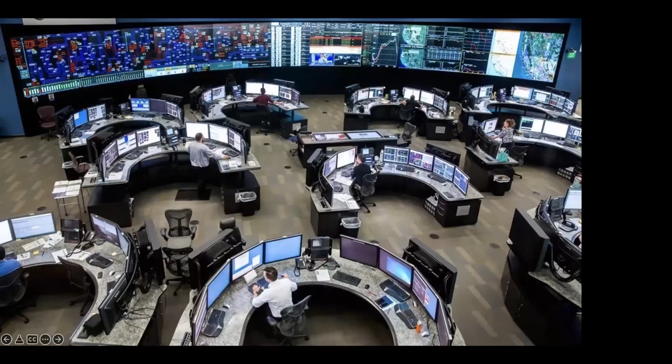What does it mean for the control room? Some of you have already been there, and we know that every desk has its own job, maybe doing the security analysis, looking at the renewables, and what I think is that we need a new desk, which is a resiliency desk, and they have to coordinate with, of course, all the other operators and supervisors and engineers. But as these events are unfolding, they have some time before the event hits, because most of these weather events can be predicted in advance with certain accuracy. Not a lot of accuracy, but we can predict with certain accuracy, and we can prepare for it.

We can take some proactive action, but we don't have tools for that. How do we tell operators what to do, right? So we definitely need some tools for that. And these events are very different, right? There are wildfires, which happen in specific areas. There are snowstorms, there are hurricanes, and these will keep happening in different regions. And second, they will impact the grid in a different way, right?

Like a flood will impact any low-lying substation, while it may not be impacted as much by hurricanes and snowstorms. Wildfire will have a different impact. If you put the lines underground, snowstorms and hurricanes will have less impact, but flood might have more, right? Cybersecurity is a totally different event, which needs to be further thought through. How do we make our grid resilient against that? But cybersecurity brings another dimension because it cannot be predicted most of the time. So today, at least I'm going to focus more on weather events.

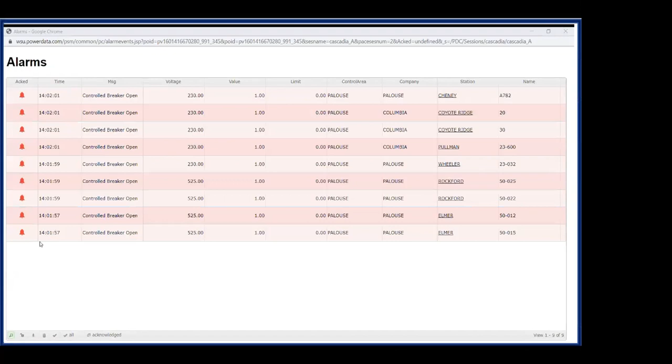Now, what does it mean for the power grid operators? They will see some alert if the event is going to come. And typically that happens on the TV on one side of the control room. They keep watching the weather. And once the event hits, they will start seeing a lot of alarms. And these alarms need to be taken care of in advance, because during these events, they are going to be in the hundreds. So no human operator can process them and decide which one to focus on, right? So we have to take some proactive action, and we need some kind of tool which will prioritize these alarms and impacts and tell them where to focus.

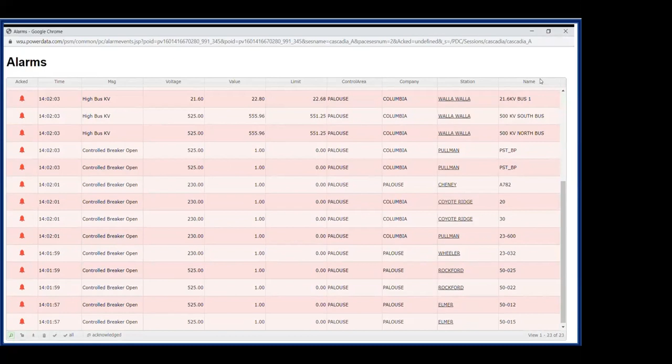Right? But one thing is sure: these kinds of events will put power grid operators in a much more stressful condition compared to normal operation and the failures that are very common in the power grid. And the only way we can help operators make these decisions is through tools. And these tools need to be very, very advanced, right? So what can we do about it? There's a lot to do.

The first one is definitely a tool which will tell them the expected impact, which will tell them, when the event is passing through, about the different alarms and which one to focus on. And after the event has gone, how do we restore the power, right? So we need these different tools, which means that there has to be some planning and proactive action. There has to be some real-time tools during the event, and there has to be some after that, right?

And what would enable is only to make a decision, either in long-term or short-term or after the event. We also need to train them to use these tools and consider cognitive science and cognitive abilities of the operators when we do this kind of training. And even for the tools, we need to always keep in mind how much a human mind can process in a short time when this kind of event is happening.

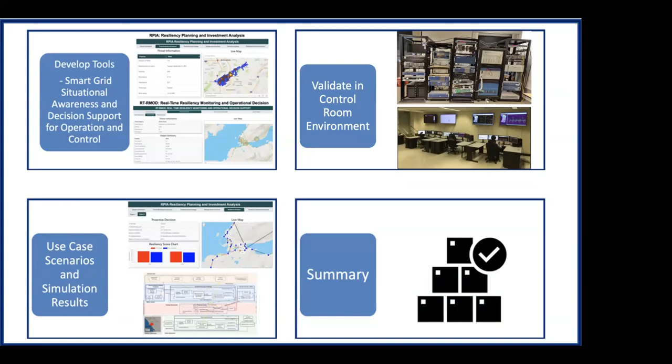So next, I'm going to focus on, like I said, the tools, then how do we validate it, some case scenarios and summary. And I always think that this is a work in progress. We are still scratching the surface because it's such a large and challenging problem to solve, because even state estimation is not robust enough to give you a solution when your sensors are failing, your grid is failing. So a lot to work on.

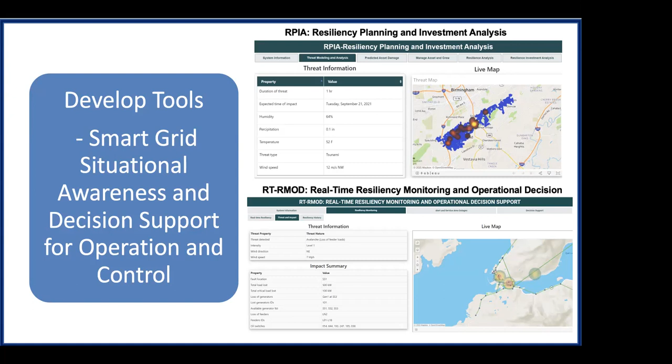So let's talk about tools, and the two tools that I'm going to talk about are resiliency planning and investment analysis, which we call RPIA, and the other one is RT-RMOD, which is real-time resiliency monitoring and operation decision. Now both of these tools, like I said, are still very preliminary. Even though we have invested several years on this, maybe more than 7 years now, with different funding, and it's still continuing, there's a lot to do.

And what we want these tools to help us do is monitor the resilience, which means we've got to have some metric, and we can see what resiliency is given a certain event. This is very important, because resiliency will change if the event is changing, because it will have a different impact on the grid. And then we want to see how it's changing if I take some action, either in long term or short term. So that's what we want to use that metric for.

And we need to compute that metric pretty quick. Quick means not in milliseconds, but at least in seconds. And continuously monitor the resilience using that tool, right? So that's about situational awareness of resiliency. And once we know what resiliency will look like if something is happening, and if we take some action in long term or short term, how it will impact, that should enable us to take a decision.

So for example, if I take all those alarms that come during the event and after, we will check which alarm needs to be taken care of first, because if we take care of that, then resiliency will improve, right? So we can compare those things using this index or metric. Proactive control, corrective control, resource coordination. A lot of these things need to be done, and some cannot be done in an optimal way because we don't have time for that. We don't have data for that. So we need to apply some non-optimal way and then some optimal way, depending upon how much data we have while doing this decision support to operators.

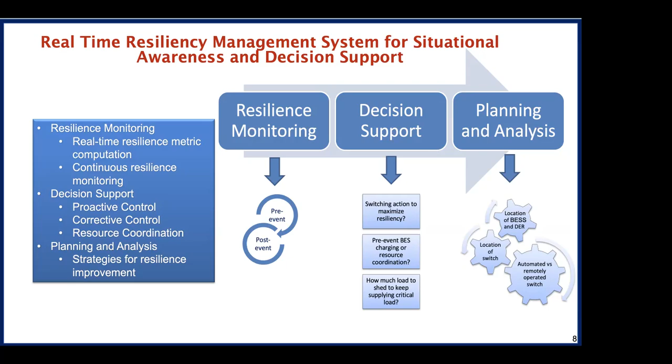And then, in terms of planning analysis, when we have a limited amount of money, where to invest and where to install those things. All of these can be, with the candidate solution, we can use this metric to tell us what to do. So finally, what we want is that there is an electric grid, either it's a distribution system or it's transmission.

And then not only do we need electric grid network information with all the resources, but we also need to know what event we are trying to protect against. We need to know some spatial information, either it's coming from satellite or from any other information that we can get for the event. We need to know some vegetation data.

We need to know infrastructure data, which is very important because for the grid, all the lines, everything is on a pole or substation or different devices, which we can call electrical grid infrastructure. And those data are there, but not in the same database. So we need to pull data from different databases. So we have all this information to analyze what will be impacted.

And then of course we need to make a planning decision, an operator decision, in different scenarios. So one is blue sky, where everything is operating very well. Black sky when these big events happen, and gray sky when the event has impacted you. And then we are in recovery mode, which is gray sky.

So based on these, what we want to do is be prepared for the expected event. We want to be robust so that the event will minimally impact the grid. And then we want to be ready with the response or recovery plan. And these two tools that we are thinking about, RPIA and our RT-RMOD, are going to basically help with those things, right?

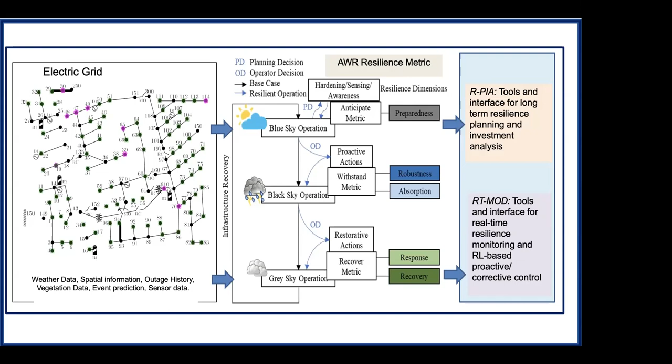So before we talk about that, I'm going to talk about AWR, then R-PIA, and then a little bit about RT mod. The first one, even though now we know a little bit more and there are multiple definitions that already exist, what is resilience before we put a metric around it? And there are multiple definitions that evolved over time and in the last couple of years.

I believe that there should be focus on critical load, because if we focus on all the load, then it's reliability, which we already do. In simple terms, it's the ability of the system to supply its critical load, even in the presence of multiple contingencies. Now, if you notice here, I did say system ability. Which means that it's more like a stability and security concept. It's not like reliability, which is performance-based.

Now, we have looked at a lot of literature, and we're still looking at it as it's coming. The two different approaches taken are performance-based and system characteristic-based. And I think system characteristic is the one that we need if we want to know what to do to fix it, because that will be represented in the system-level metrics.

And the one which I like is from FERC, which is the ability to withstand and reduce the magnitude and duration of disruptive events. Of course, it includes the capacity to anticipate, withstand, adapt, and recover. Now, these three words are important: anticipate, withstand, and recover. We took these three things and said, okay, in the power grid system, what are the different parameters which will impact my ability to anticipate, ability to withstand, and ability to recover. And then we collect those factors and integrate them together to form three different metrics, which we call the AWR metrics.

And the other one is RT-RMOD, which is the real-time resiliency monitoring and operational decision support. Here you see we have system information and then resilience monitoring, and then alarm and service area outages. Basically, we want to process those. And then decision support, which is the most important one. Each of these tabs again opens up to several sub-tabs where we can get the information. Especially the left bottom one is showing you the resiliency metric for these five different colors, and we can compare that for anticipate, withstand, and recover.

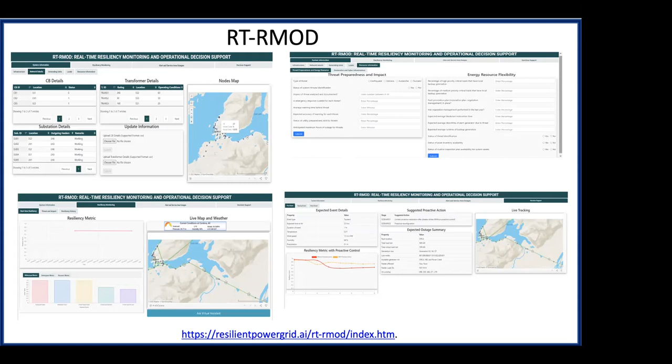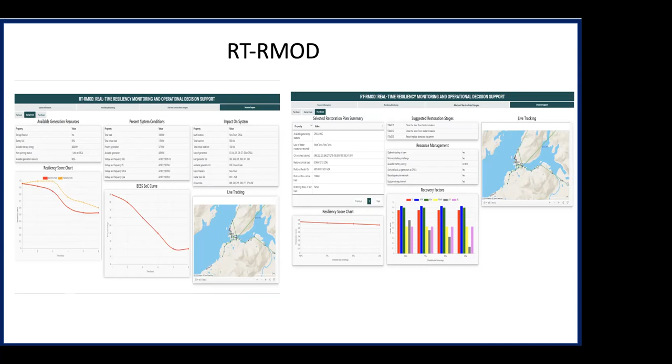So then next comes the decision support using these tools, and that's where a lot of work needs to be done. Here are some examples, like pre-event proactive control or post-event corrective control; we have multiple things to do. First we need to know the damage and outage estimation. So how do we use satellite images, ground cameras, and weather prediction to find out the damage and outage estimation in minimal time? Because that's what is important.

And then, if needed for proactive control, do we need to segment our grid so that the part where damage is expected will not cascade to the rest of the network? So how do we decide that part? That's a good problem to solve. Then in terms of distribution automation, where we have a lot of flexibility, how do we use it to make a sectionalization or cluster in a distribution grid so that any disturbance does not propagate?

And the second one is, if we have enough DER, how do we isolate that part? Sometimes we might need to form a temporary microgrid, because with the microgrid, the power we get, especially if it is diesel, or even steam or gas, is not the most economic. So we want it isolated only during these kinds of events, but most of the time it will be connected with the grid. That's how most microgrids work anyway.

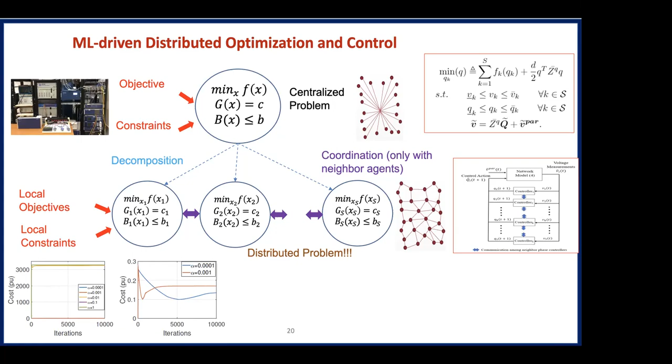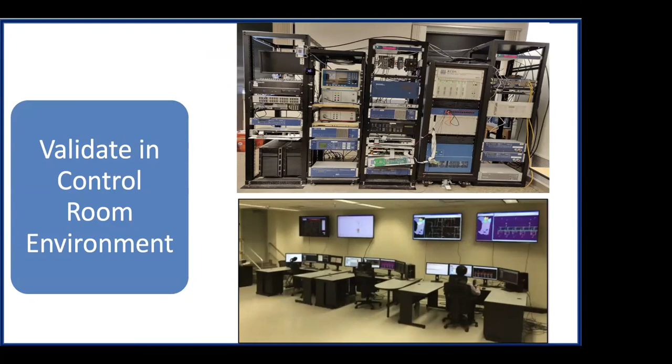So now let me talk about validating it, and this will be a very short section. We do need something like a substation environment with real sensors and controllers. And then we need something like a control center environment. Of course, these are very small scale that we have set up in our lab, but these two are definitely needed if we want to put our tools out and push them to a real utility. So we have to do preliminary testing here, and then large scale testing with the utility, and then solve the problem. So a little bit more detail on this, because we can even integrate our substation environment and control center environment together.

So this is based on one of the projects that we have been doing with NSF Big Ideas, and the partners are Berkeley and Vanderbilt. And here we are also collaborating with a company called Resilient Grid, which makes visualization software considering human cognitive science and cognitive engineering to develop these HMIs. And we are working with the IncSys PowerSimulator, which provides us basically all the EMS functions, like contingency analysis, alarm, AGC. So all those are there in that engine.

And we are bringing this set of data from our substation environment to a common database. And we also have a detailed cyber network model so that we can simulate those. And then finally, we're using PingThings for synchrophasor data set database and managing it. So all this integration is challenging, but we have been making some progress on that, so we can use our tools in this real-time environment.

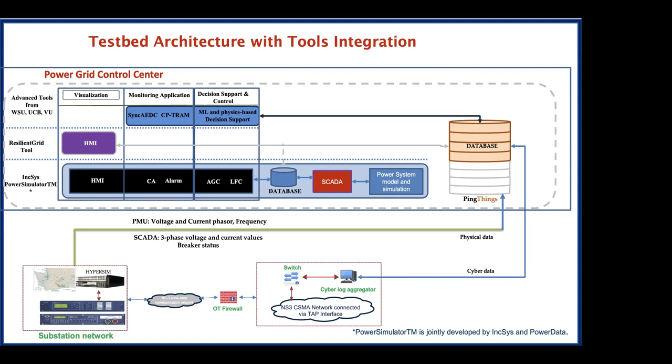And then cyber physical simulation test bed, which is kind of imitating the substation environment with the real devices. We mainly have SEL, but GE, ABB, and several others. And we worked with ARPA-E and Vanderbilt to develop this RIAPS node, which is for distributed control. So the small controllers that you see in the bottom figure, the three, those are basically representing distributed control. Of course, it could be more, it could be hundreds.

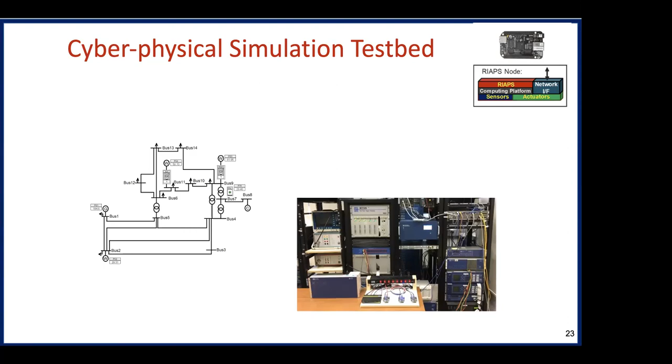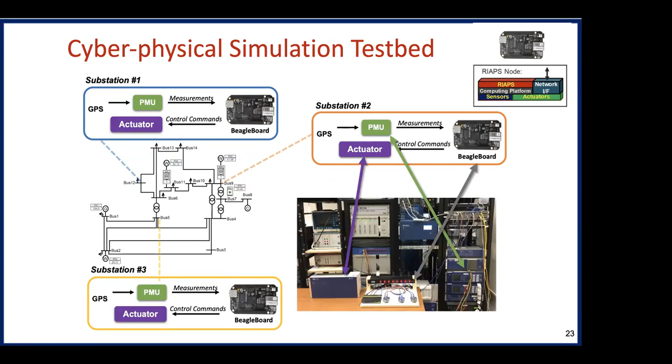But we just demonstrated with these three that if you have a system, we can put substation devices in terms of, here it's only PMU-based control. So it takes the PMU data and then goes to the BeagleBoard. That's where distributed optimization is running. And then we get the actuator and then we implement that control. So we were able to demonstrate that it works, even if it was suboptimal.

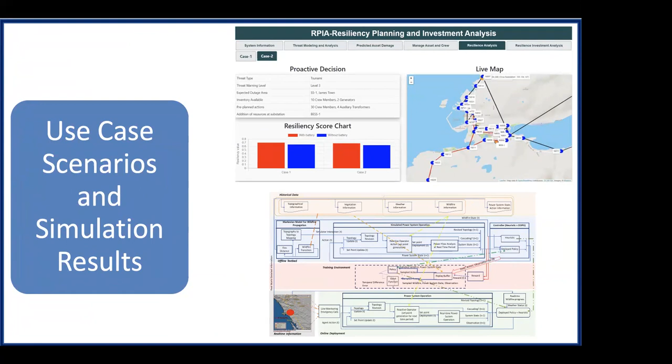And some of the cases that I'll demonstrate now, like I said before, what we are doing is only a fraction of things that need to be done, right? For transmission, for distribution. So there are different tools being used for different systems and different events. So I'll pick a few examples.

For example, we worked with Alaska where the tsunami was a problem, or at least expected sometime. And what we did is that we analyzed in terms of assets, even though you can also plan with the crew members, in terms of assets, where to invest our money in such a way that resilience is maximized, right? So here they wanted to buy a battery and see how it is going to maximize my resiliency. So again, using the same metrics, I can compare.

You can see case 1 and case 2, which are two different cases of batteries. And then it shows with battery and without battery, how much advantage you're going to get. So with the resiliency advantage and the amount of money that we're going to put for two different options of battery, and you can have multiple, like 100 options by placing it in different locations, compare, and then decide, okay, where to put my money.

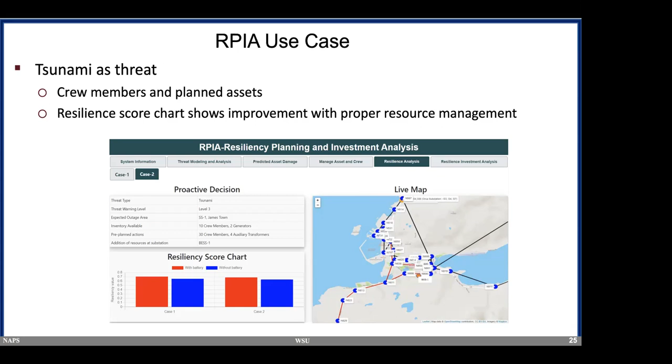Second case, I am going to talk about resiliency decision support. And this one is proactive control, so before the event is going to happen. And the whole concept here is based on the fact that you have switches in the field which are automated, and then you have switches in the field which are manual, right? So you have three different kinds. One is automated, one is remotely operated, and one is manually operated.

Now, automated, if it's there, we don't need to do much because you already set the logic for that. If it's manually operated, a crew member has to go and open it or close it well ahead of the expected event, so that they are safe. If it's remotely operated, then you just need to operate it, and you need to know which one to operate, so we have the minimal impact on the grid.

Now in this one, what we are looking at is how do I make a cluster of the system in such a way that the impact is not propagated. So we isolate the part which is going to be impacted anyway. And if we isolate it before the event happens, if we have good confidence in the prediction, then it definitely will not propagate, because that part is already isolated.

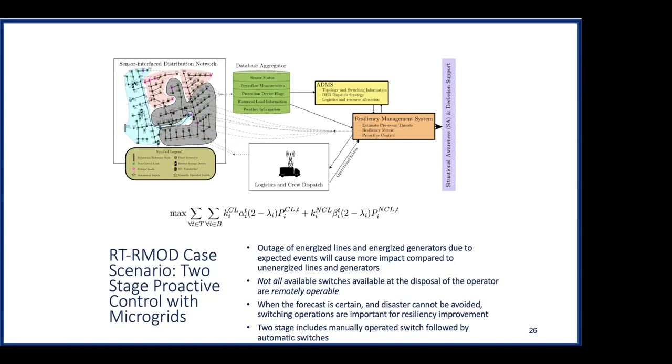So again, the focus here is that if we have a good prediction, then all the components which are going to be de-energized because of the impact of the event, how do we de-energize them ahead of the event so that the disturbance does not propagate? And it will require us to send the crew. It will require us to look at a lot of databases and then get the data from the ADMS so that we can put the resiliency management system, which is basically RT-RMOD here, to compute the metrics and decide where to isolate.

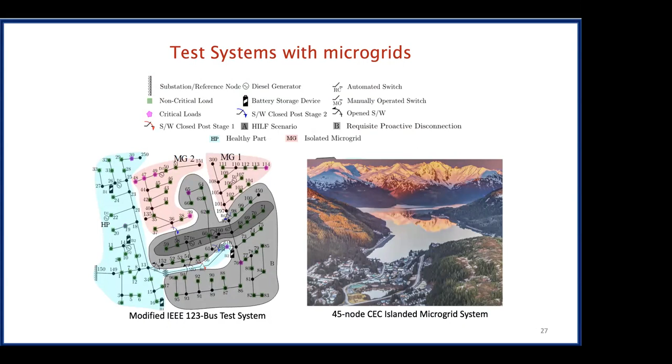So this one is the Alaska system that we worked with, CEC, Cordova Electric Cooperative. And of course, we did use an aggregated model, but it can be done for an IEEE test system or even any larger system. And this is how it will look after the modeling.

So we have a predicted event and it's progressing well. And then there's a distribution network, which is a lot of interface of sensors, and we are getting those data. Early warning tells us that, okay, this is going to hit 1 hour or 2 hours later. And now we need to send the crew so we can open the manual switches. And then, just before, a few minutes before the event is going to hit, with the uncertainty which we already know, we open the remotely operated switches, and the automatic switch is going to take care of itself. Or sometimes we need to block them so they don't open automated switches, right? So all these actions need to be taken.

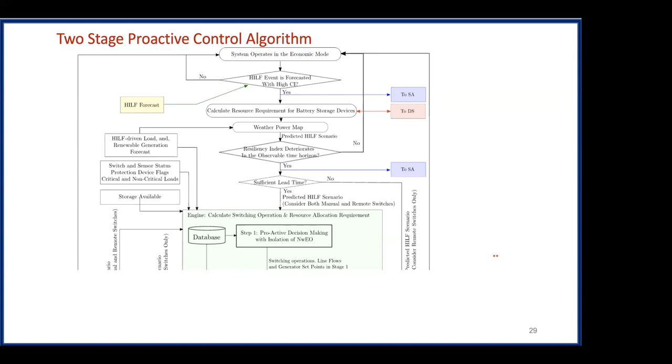And sometimes we will have a lead time sufficient enough to send the crew to open the manual switch. Sometimes we do not. So based on that, we can change our algorithm. Stage one is isolation of the network with the manual switch, and then stage two is the automated switch. So stage two is safety constraint switching without isolating the part which is important for us.

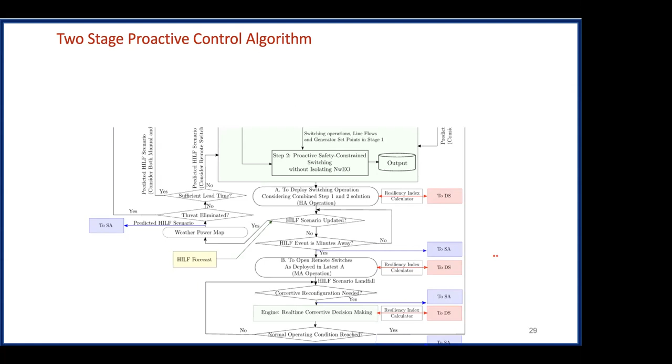And all of these two are going basically to two places. So one is situational awareness and one is decision support. So you see that To DS is decision support and To SA is situational awareness. And some are going and some are coming back, some are going to and fro. But all of these can be formulated and put in a set of equations with the objective function and constraints, considering all the power system constraints, and then we can solve it. And you can also solve the same thing with the distributed approach, which is still in progress that we are working on. But here's the result that you see.

And again, this is only one example of different things that need to be done and different things that we are doing. If I take action in advance, then the overall resiliency after the event is improved. So you see that the blue curve, which is showing the resiliency after, is higher after the event is gone. Right? If you don't do something, then it will become the red one, which means that after the event, it is not recovering and the resiliency is down. Right? And there are different scenarios that are shown here in the red, blue, and green.

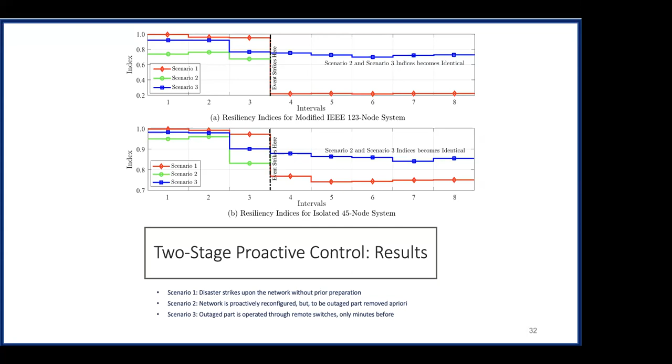If it's an outage event, then we need to focus more on that, and then rank them in such a way that the operator can make a decision on where to focus, and then find out why it is happening, what was the root cause that caused that outage, and then provide decision support. So the whole process is a little bit longer, which of course I did not talk about today. We only talked about monitoring and decision support, but this whole process needs to be followed, and each of these is a very challenging problem to solve, while you have less access to data and less access to your system information.

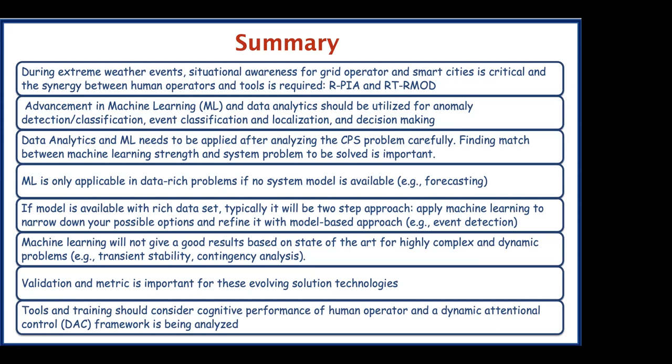The last thing is the way the human mind works under stress. Knowing their cognitive science ability is very, very important, especially for enabling them to take a decision during an extreme event.